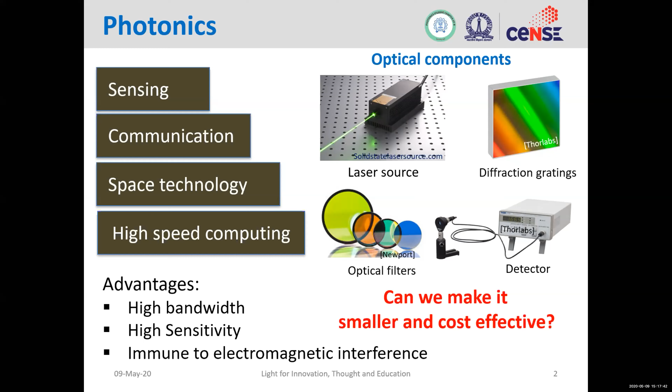If you combine all these things, since they are discrete, it becomes a very big device overall. And since you have to buy them separately, it becomes more expensive. So the question comes: can we make it smaller, or more cost effective? The answer is yes. One way to do it is to use photonic integrated circuits. A photonic integrated circuit is a technology that offers integration of various optical components and/or optical functionalities on a single chip, taking advantage of micro and nano fabrication.

Here in the figure, I'm showing an example of photonic circuits. Using a photonic circuit, you can divide power into different channels, and using ring-like structures, you can filter out different colors of light. If you want to tune this filter, you can have on-chip heaters to tune these filter operations. And you can also have on-chip photodetectors.

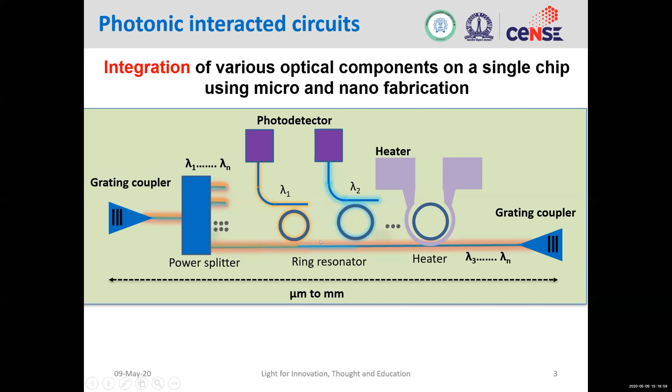Similar to electronics, where copper wires are used to conduct electrons, in the same way, the waveguide is one of the basic building blocks, used to connect different components and to transport light. So this waveguide is a very important component for building as well as connecting different components.

Here I'm just showing a few applications, but the applications are endless. These are some of the most common applications where photonic circuits are being used: communication, sensing, and high-speed computing.

Today in this talk, I will present a brief introduction to optical waveguides, the criteria for material selection, and the fabrication process flow. In fabrication, there are two basic processes, lithography and etching, which can be used to fabricate a device. I'll explain lithography and etching. For patterning photonic circuits, electron beam lithography is a very versatile technique with which you can pattern very fine features. I'll be discussing this in detail in the following.

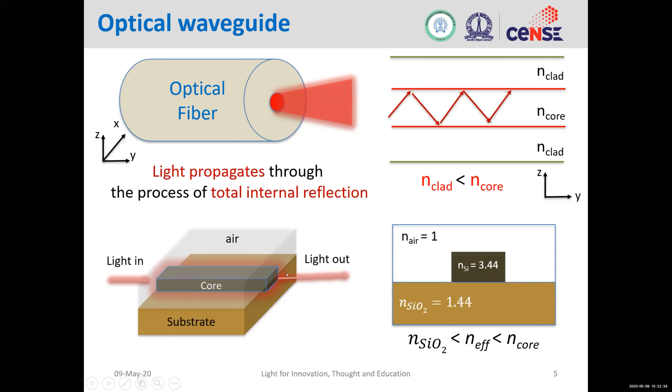So here I'm showing an example of a simulation where the red color indicates that light is confined inside the silicon. The thickness is just 220 nanometers and the width is 450 nanometers. So this indicates that devices are very small and compact. So the question comes, how do we select this material? What material is best and what material is suitable for guiding light?

For the material selection, again, I'm taking the example of an electronic circuit. In an electronic circuit, copper is used because it offers the minimum resistance. Similarly in optics, if you want a material to transport light, you want minimum absorption so that it can travel a very long distance. It turns out that silicon and silicon dioxide are very good materials, transparent in the telecom regime, so they can be used for telecommunication applications.

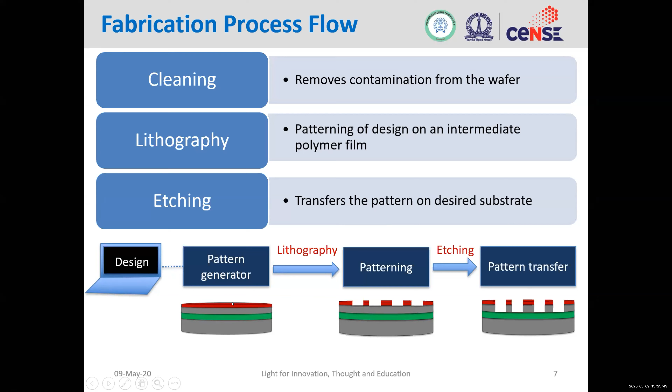The first step in lithography is coating, to get something like this. So how do we do that? The coating is done by a process called spin coating. In spin coating, the wafer is placed on a chuck, which holds it by vacuum, and then the solution or polymer is dispensed. On the right hand, I'm showing a figure where a person is directly pouring the polymer onto the wafer, and this is the wafer and this is the chuck.

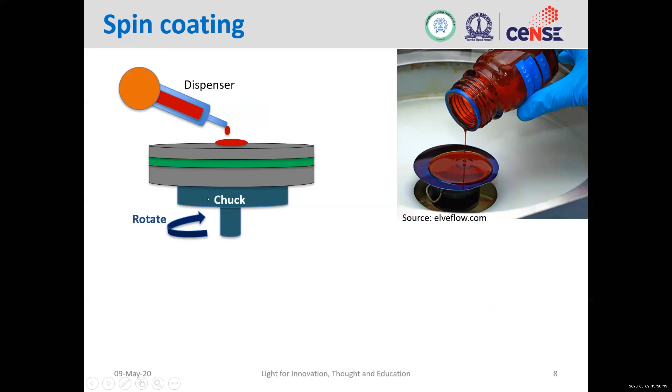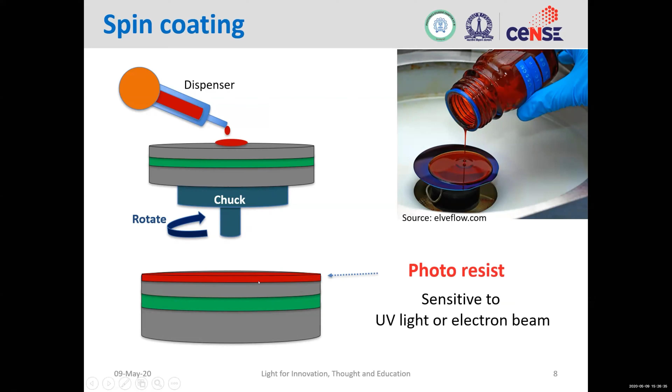In order to get a very uniform coating on the surface, the wafer is rotated at a very high speed. By this, we can achieve a very uniform and very thin layer. Basically, the photoresist, or resist, is a polymer which is sensitive to UV or electron beam. So now we have achieved this. The next step is to pattern on this. The pattern can be achieved by electron beam lithography. Here I'll be explaining electron beam lithography, but there are other methods such as optical lithography by which you can do the same process.

So after the exposure is done onto the polymer, the next step is to put it into a solution or a chemical, which is also known as a developer. So the exposed part will get dissolved. So in this step, what we have achieved is that the pattern or the design which is there in your computer gets translated onto this thin intermediate polymer layer.

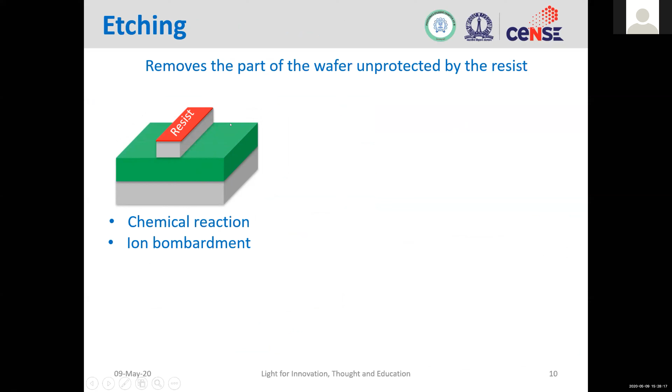So like I've said, the next step is etching. So what is etching? Etching is basically a subtractive method, or it's basically the removal process by which the part of the wafer unprotected by the resist gets removed. So here, when you expose to a chemical, it can be either a chemical reaction or an ion bombardment. So the portion which is not protected by the resist will get removed.

So in etching, there are two possible things that can happen. One is isotropic etching and one is anisotropic etching. So in isotropic etching, the etch rate or the removal rate is the same in all the directions. So you'll end up with something like this, which is not desirable, because we want something like this, but we end up with a structure which looks like this.

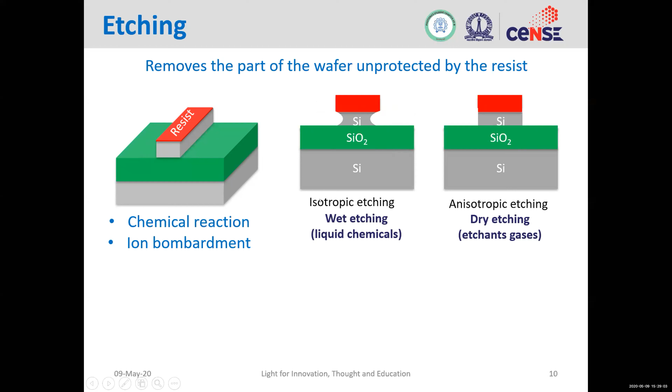The other is anisotropic etching, where the vertical direction removal rate is faster than the horizontal. So you'll get a structure which looks similar to this. So isotropic etching happens when you use liquid chemicals, but anisotropic etching happens in a dry etching process. So the advantage of dry etching is that you can use gases, and by tuning the parameters, you can get anisotropic etching.

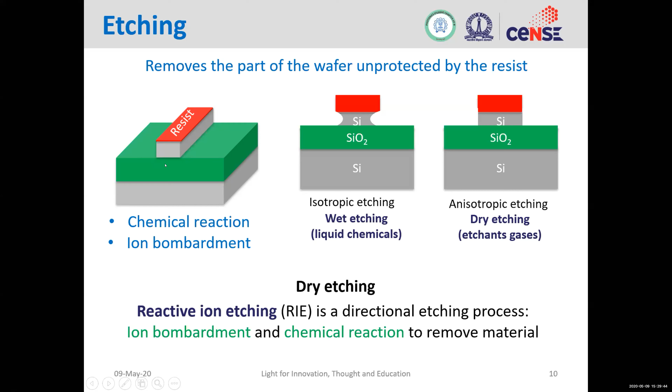So one way to achieve it is to use reactive ion etching. Reactive ion etching is a directional etching process which uses a combination of both. For example, you'll have ion bombardment and you'll have chemical reaction. So by this way, you can achieve a structure which looks something similar to this. So how do we do reactive ion etching? Reactive ion etching is basically a plasma etching.

So you'll put your substrate in a chamber which consists of two electrodes, and then you'll supply a gas. So when you apply the right amount of voltage, the accelerated electrons will come and hit the gas molecules, and then they will ionize. By this way, it will also generate very highly reactive radicals. So when these radicals and ions come and interact with the surface, the unprotected part gets removed.

So this is a process by which the unprotected part gets etched or removed via chemical reaction or bombardment. So this is the complete process by which the intended design which is there in your computer gets transferred onto your substrate.

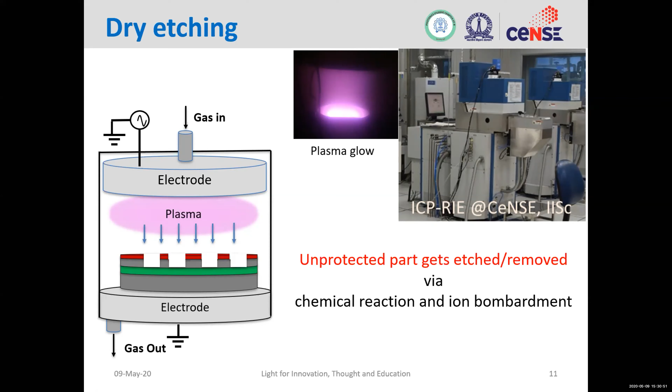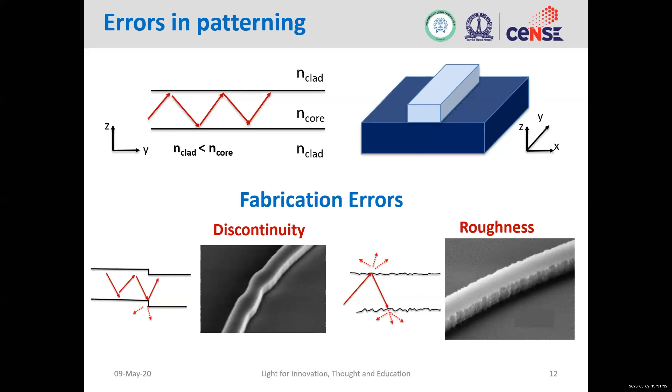So where do these kinds of errors come from? Basically, they come from the patterning. So let's have a closer look at the patterning techniques. One of the most common patterning techniques is area mode patterning, which is also known as deflection of the electron beam. What I mean by that is that the electron beam is being deflected, and then you get the patterning.

So let me play it once more. You have this electron source, and you deflect the beam, and then you get this kind of structure. But in a photonic integrated circuit, these devices are quite long, and they cover a large area. But the deflection of the electron beam has a limited range. So how do we write this long circuit which covers a large area?

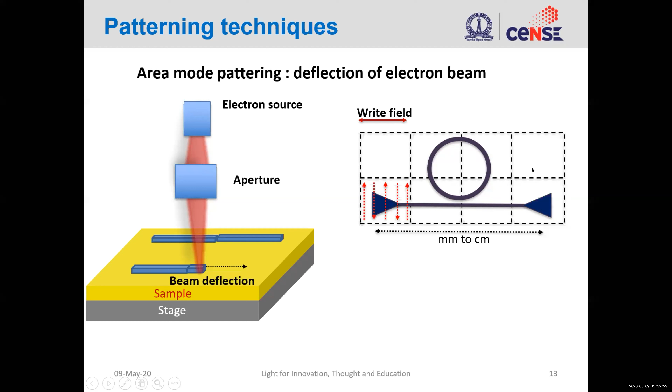One way to do it is to divide this area into small boxes, which are also known as write fields. You can deflect the electron beam in a small area, then move the stage and write this, and then you can write the complete area. But the problem here is that as you keep on writing, the stage has some drift over time because of the noises in the tool. This noise results in a misalignment between these two areas.

So as a result, this is a very common problem that you'll face in area mode writing, where you'll have this kind of discontinuity. So stitching error, as we have discussed in the previous slide, results in high optical losses.

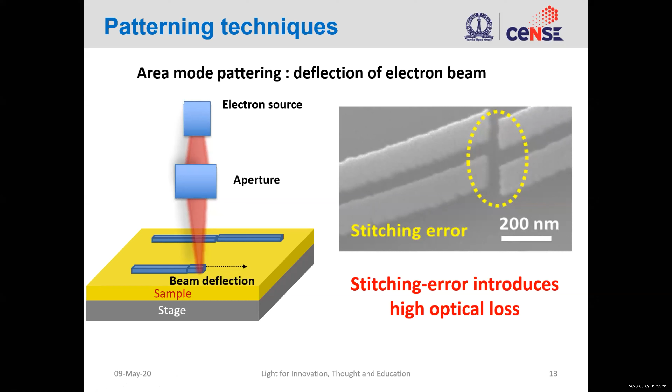So how do we avoid this? In order to avoid this, one way to achieve it is to use a method called fixed beam moving stage. As the name suggests, you fix the beam and then you just move the stage. By this way, you can eliminate stitching error, and you can write stitching-error-free over a large area. So this will completely eliminate the problem that we had in the previous slide.

So let's look closely at the photonic integrated circuit. As I explained in the first slide, in a photonic integrated circuit the waveguide connects different components, but different components does not necessarily mean that all the widths will be uniform. So in order to efficiently couple light from one width to another width, there's something called a taper, which is basically a varying type of structure. By this kind of structure, you can connect two different widths, so you can efficiently couple light from one system to another system. This is very important for making a very efficient photonic circuit.

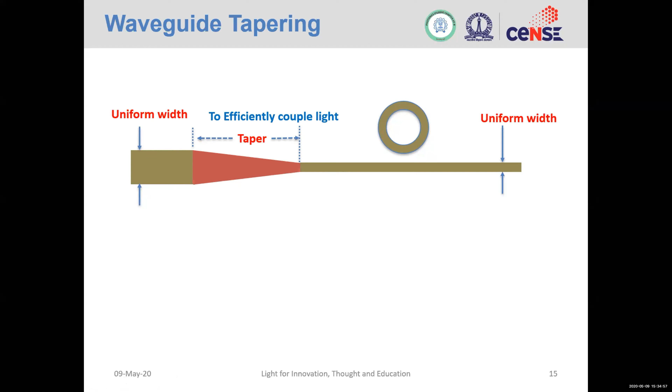So can we write this with the FBMS structure? The answer is no. You can write this, but you cannot write this. This limitation comes from the tool; FBMS does not allow that. To overcome this, one way is to use a combination of both FBMS and area mode. You write the taper area using area mode, and then you connect that. But again, the problem is that the stage drifts over time, as I explained in the previous slide. So you'll end up with some alignment error at the overlap region between FBMS and area.

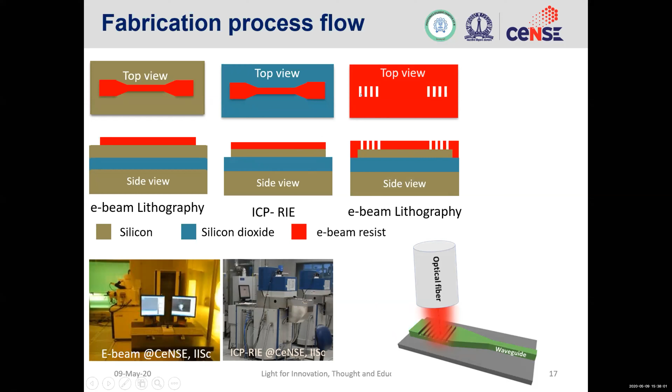In the etching, you put it inside an RIE, and the silicon gets removed in this portion. You time it in such a way that when it reaches silicon dioxide, you turn off the process. So the waveguide part is achieved. The next step is to pattern these corrugated structures. To do that, we do another e-beam lithography where we pattern only in this portion. After patterning and putting it in the developer solution, this part gets dissolved. Then you do another RIE, and remove the photoresist. This is the complete process flow for making a waveguide and the coupling structures.

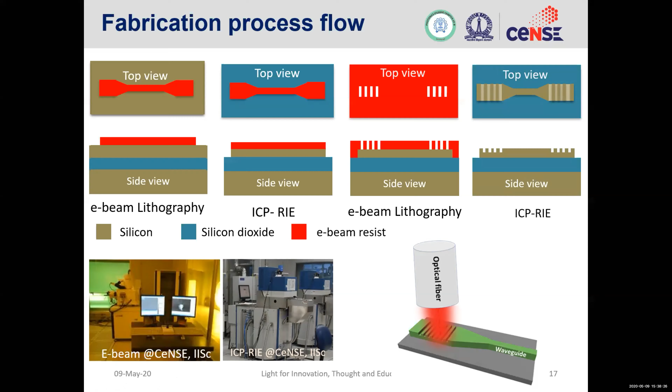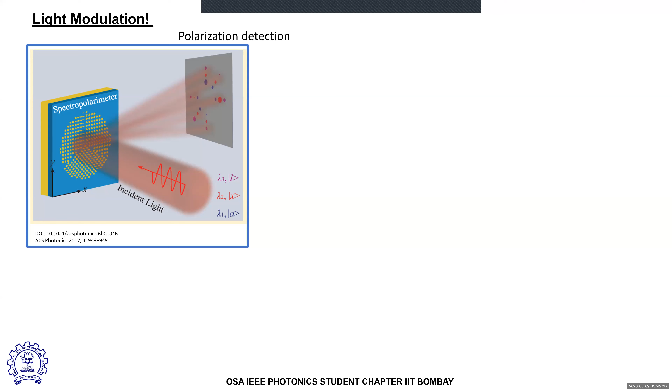As an example, we have polarization detection. Metasurfaces are used as a sandwich structure, where metal-dielectric-metal is used for polarization detection. A normal incident beam can be separated into different states of polarization. Moving on, metasurfaces and metamaterials can also be used for beam splitting, where incident light is split into different polarization states by introducing a phase difference between the two orthogonal components of the incident light.

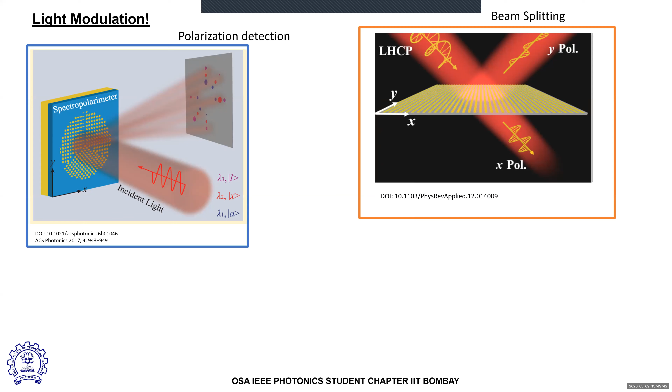We also have different sizes of these nanostructures. Instead of just rectangles, you can have meta-atoms or meta-molecules, with two or three structures in a single unit cell. Changing the dimensions within a single unit also introduces phase and amplitude modulation into the reflected beam, which can be used for vortex beam splitting and polarization detection at the same time.

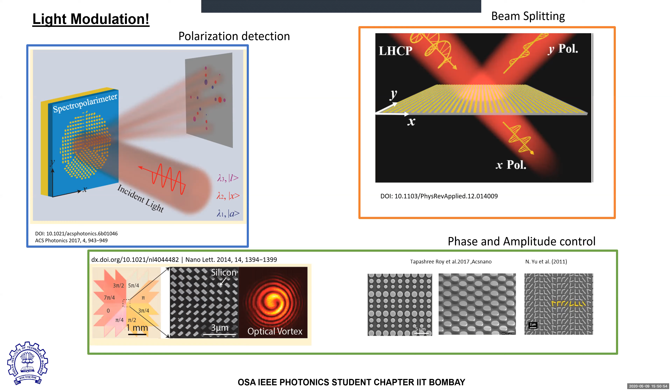These kinds of applications make it intriguing to know how light interacts with matter at the sub-wavelength scale, and to understand these interactions without directly going to fabrication, we need to understand the working principles of electromagnetic interactions at these levels. So here comes the simulation part, where we try to model those systems and see what understanding we can take out before going into fabrication.

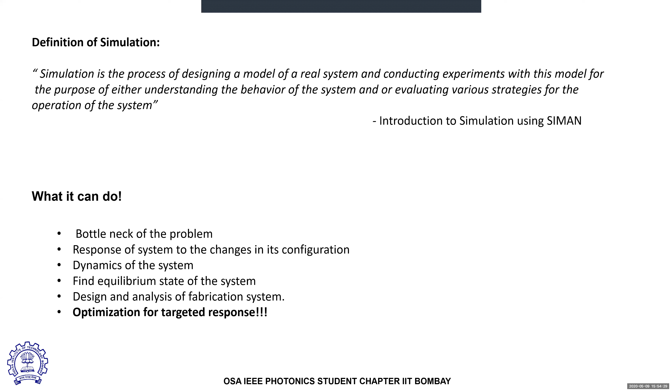So in the metasurfaces and metamaterials, for these designs and analysis, what we do is we do the optimization of the device. And these optimizations are mostly related to the topology optimization, where you try to optimize the size dimensions of the device and try to see how the response of the device changes by tailoring them. So while doing this, we try to adapt some modeling methods in these nanophotonic systems, which are typically based on solving these four Maxwell's equations. So what we do is we try to solve in different scenarios these different equations and try to see how the system is responding.

So the first method is finite element method, where what it does is it divides the whole system into the small elements, and these elements are used to calculate the response of the system at the level where you have approximation very close to the accurate responses. So suppose you are solving for the bottom two Maxwell's equations. This finite element method, for a particular element, solves the Maxwell's equation at two nodal points and tries to see the approximations at those points.

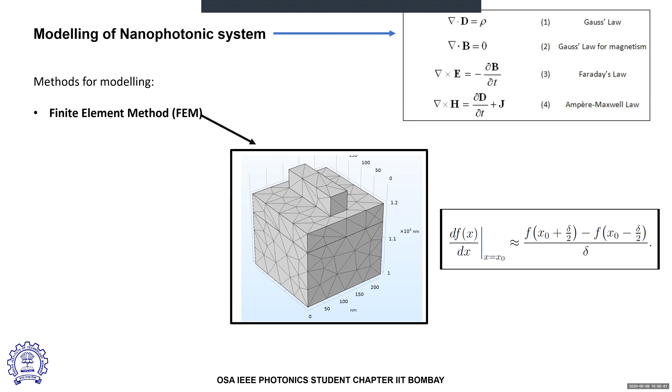But the good point here is that the smaller the element size is, the better the approximation, but it increases the computational time drastically. So we have to be very careful about choosing these elements while performing these simulations and solving the Maxwell's equations.

Then the next method is using finite difference time domain method, where you only solve for the bottom two Maxwell's equations. Why we try to solve here these curl equations is because we want to see the progress of the solutions of our Maxwell's equations in time domain as well as in the space domain. So what we do is we perform the discretization of the time as well as the space.

So while solving these finite difference time domain equations, the algorithm works in a way that you know a previous solution, then the next solution is computed on the basis of the previous solution, and this cycle repeats till all the solutions are evaluated.

Then we have another kind of modeling systems which use evolutionary algorithms and genetic algorithms, where you try to minimize the function. The function is the combination of some desired functionality, where you could have phases and the amplitude. Now minimizing a function means that you are trying to find the optimal minima or maxima for that function, such that while tailoring the parameters p of the geometry, you get the highest response of the phase or the amplitude by minimizing those functions.

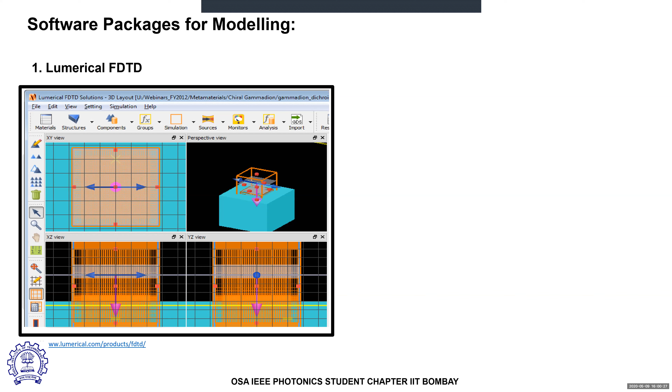Now moving on, for the FDTD and FEM packages, we have some softwares out there which use these concepts. We have Lumerical FDTD software packages and COMSOL Multiphysics FEM. Both the packages work just differently on different methods of optimization, but the interface and the functionality is more or less the same. Only the background algorithm working is different. So if you get acquainted with one of those packages, it's easier to get acquainted with another one.

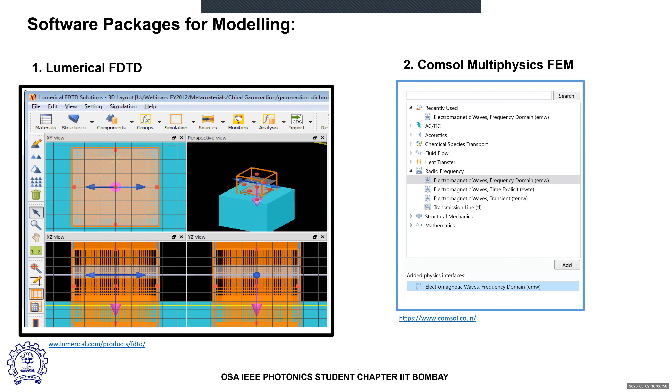So here I will start with discussing a simple example from the COMSOL Multiphysics, how you set up a simulation, what are the steps important in those simulation processes. So here's a simple window of COMSOL Multiphysics, where you will see there are different panels in which you can choose different options for your simulation processes.

The topmost panel is the add-ons, where you can add different kinds of elements to your simulation process, which includes adding a material or the type of physics you want to solve. It could be solving for semiconductors or the plasma, or you can solve for the radio frequency regimes also. And then you can also have some external after-simulation nodes, where you can add the plots, or export the results to see how the results have been due to your simulation processes.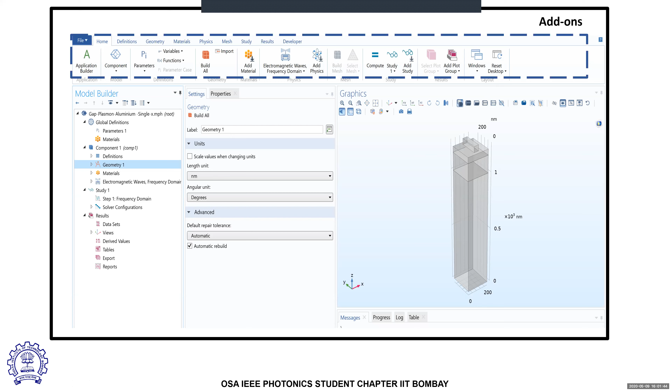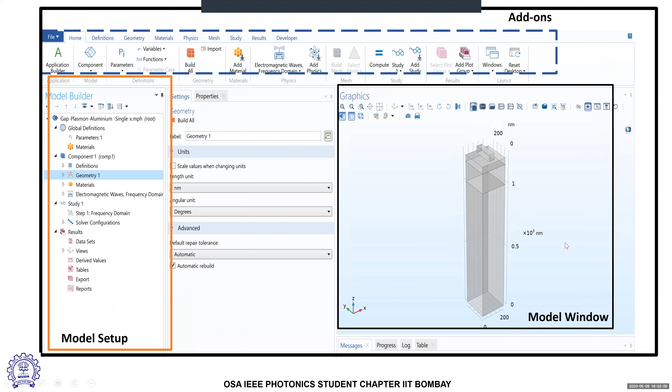Now then you have a model setup also, where you set up all your model with the initial parameters, materials, geometry, and the physics defined. And then, after running the simulation, you get the results. And then the third element is the model window, where you can observe your geometry, the meshing, and the output results. So here is an example.

So in setting up a simulation, the first task is to set up the parameters and the variables required for your simulation processes. These could be defining the frequencies, the geometrical parameters, or unit cell size, these kinds of constant parameters which you will be using in your simulation, or the variables, where you could have a situation where you want to define the material as a surface conductivity or a function of some electric field or magnetic field calculated.

And then you can have the geometry setup. Once you have set up the geometry, you could have different assumptions where you could have PML layers at the top and bottom, semi-infinite substrate. You can define the meshing over the geometry, size of the geometries, and other things. And you can choose the scale of the geometry depending upon in what length scale you are working. Then you can define the materials.

So the third step is materials, where you can choose the built-in materials, or you could have situations where the materials themselves have varying refractive indices, permittivity, depending upon the wavelength range you are working in. Some materials like silicon have varying refractive index in the visible region. Some materials like hyperbolic materials have varying permittivity as a tensor. So you can do all that while importing these materials or defining your own materials.

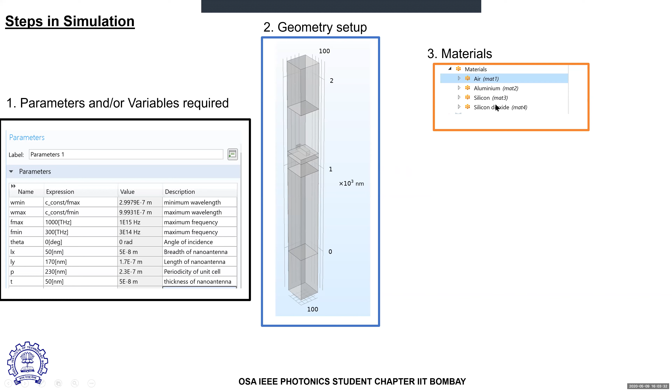Then you have the meshing, which typically defines how your algorithm is going to work, at what points it's going to calculate, and how close your approximation should be. So the smaller the size of these elements, the closer the approximations are, but the simulation times get exponentially increased

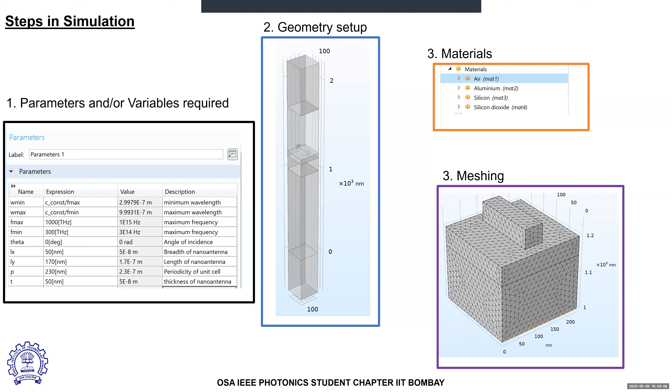due to this meshing. So the alternative method is you define the regions where the most important coupling or interactions are happening, and there you can increase the meshing, and at the other regions you can have a lower meshing so as to compensate for the computational time.

Then you can have setting up the physics study, where you can define different periodic conditions, scattering conditions, and define the ports, where you define where the source and the detector are, where you calculate all the fields. And then different wave electric equations, where you have a perfect electrical conductor situation, or different domains where you can define different physics also.

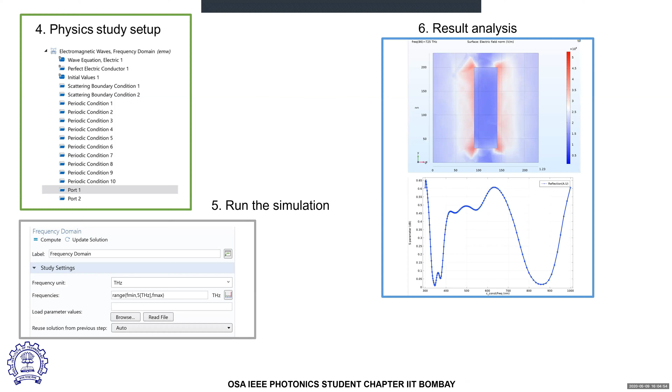Then comes the final step of running the simulation and analyzing the result. So mostly there could be situations where you want to run for a particular frequency or a range of frequencies, and then you can analyze the result by looking at the field profiles and the corresponding reflection spectrums.

So now, after doing all the simulation methods, one thing which was understood is that with increase in complexity of the nanostructures, the simulation time increases. So deep learning has been introduced as the alternative for understanding the modeling of these nanophotonic structures, their topology and their corresponding responses.

So if you have a simple single resonance device, then you could have simple analytical modeling, and with increasing complexity of the response, you increase the modeling setups, which go from semi-analytical to FEM and FDTD methods. But when the complexity increases, where you have multiple materials, multiple topologies, or you want to find topologies for which the desired responses are achievable, it requires highly complex simulations and solving of Maxwell's equations, and it gets very complicated to solve those equations.

So people have been using deep learning methods, and these deep learning methods have been successful in comparison to FDTD simulation, where a particular full wave simulation could take hours or days in some scenarios, but a fully trained machine learning model can generate the optical response and a desired topology for a desired response in a few seconds.